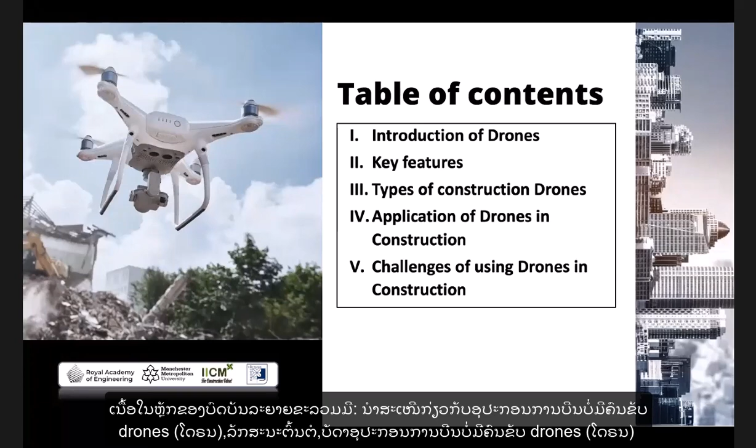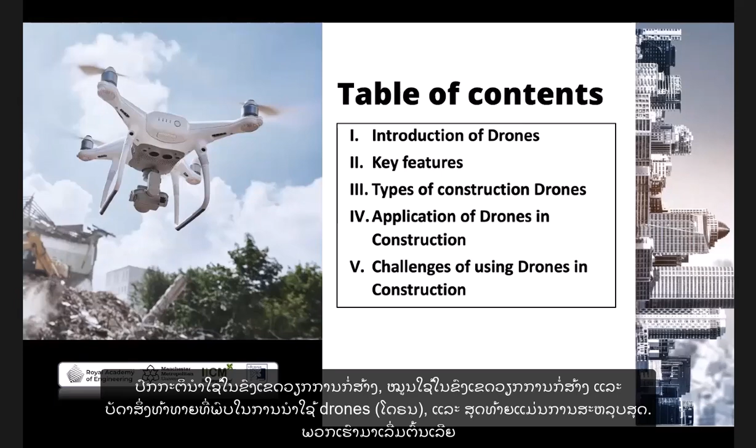Today I'm going to present to you an article which I wrote about drones and its uses in construction sites. In this presentation, I'm going to present the introduction of drones and the key features, the type of construction drones and application of the drones, and the challenges which are facing. In the last part, it will be conclusion. So let's start, starting from introduction of drones.

Actually, the actual name is UAVs, also meaning unmanned aerial vehicles, or drones. Drones itself means aircraft. They were originally invented as a war weapon, and they were used for missions that would be very dangerous for humanity. But recently, they are also being used in other fields, for example, for civil purposes, for business purposes, for military purposes. Civil purposes, for example, they can be used for recreation or disaster relief, also maybe for archaeological sites or conservation of diversity, and especially for law and enforcement.

For business purpose, they can be used for journalism, or maybe for advertisements and agriculture purposes, also for cargo transport and all that. And in military purpose, they can be used for surveying, for some special missions which are related to military.

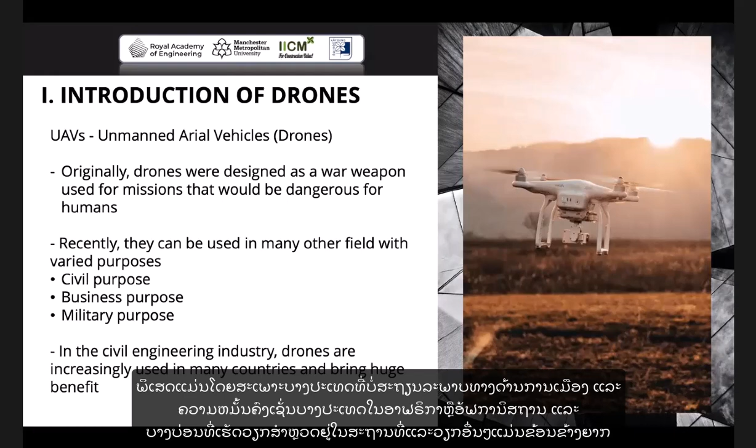But recently, the drones have really boomed the construction engineering industry. They are increasingly used in many countries to bring huge benefit, especially those countries who are unstable or where security is not good enough, such as maybe Africa or Afghanistan or some other countries where surveying and construction sites could be a little bit tricky. So they have been used for these purposes.

A key feature of drones: drones actually are very simple, with very basic features. For example, it has a GPS, which monitors the longitude and latitude and elevation points. It has a camera that shoots high-resolution photos and time-lapse videos, and also thermal sensors that take aerial heat and thermal images. For example, you can see the movement of bodies or the thermal reaction of a building in construction.

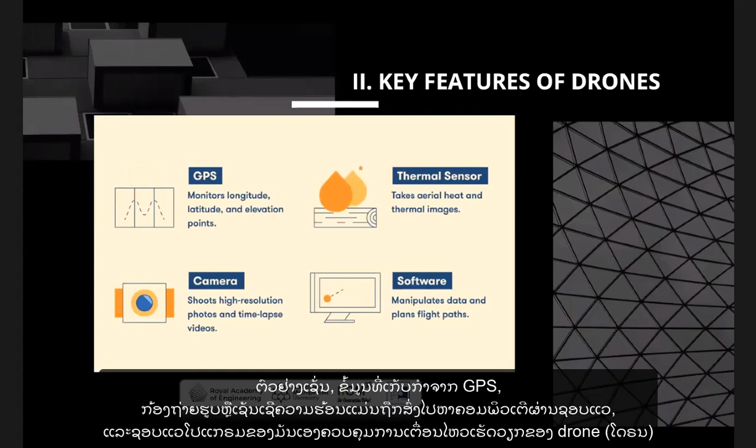And it has software which manipulates data and plan flight paths. For example, all data which is captured through GPS, camera, or thermal sensor can be sent to a computer by software, and the drones are also operated by software. So this is the main point of the feature.

We have types of construction drones. There are various types of drones, but in construction we are using commercial drones. In commercial drones, there are two popular types. One is fixed wing drone, and the other is rotary drone. Fixed wing drone is used for mapping and scanning, because it can go a really high distance or long distance due to its design.

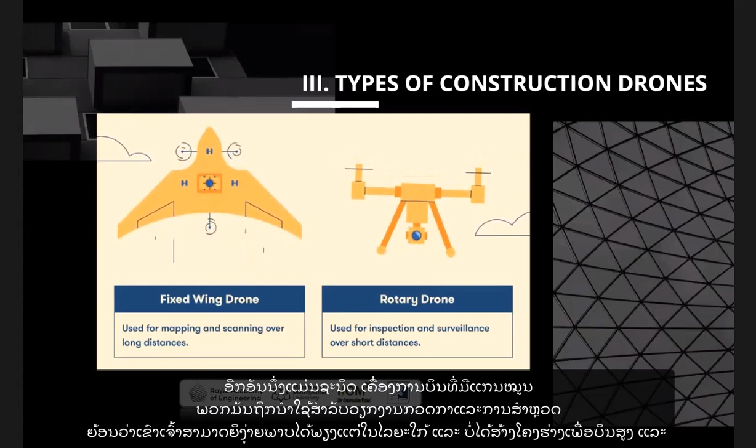The other is rotary drones, used for maybe inspection or surveillance, because it can only cover a very short distance. So it is not, let's say, as powerful as fixed wing drones. So the rotary drone is more light.

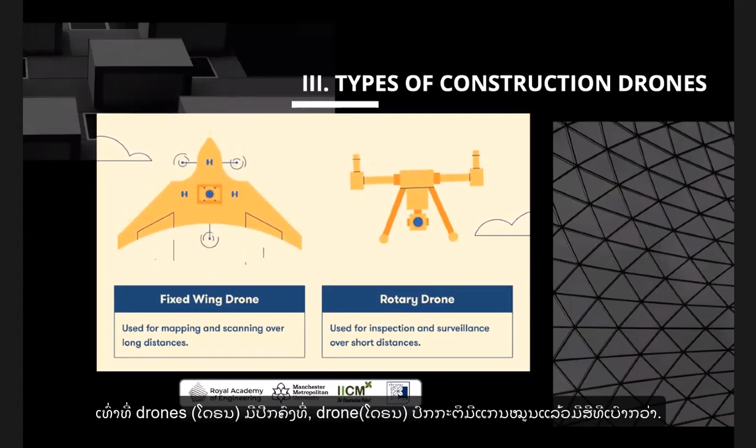Now we have applications of drones. There are many applications, but I have figured out 10 which were more eye-catching, or let's say more important. First of all is building surveying, one of the most important parts in construction. How can drones help us in this part?

For example, it can save us from wasting time, like surveying is always time consuming. So it can easily survey these buildings, and it can also help with risk. What do I mean by risk? For example, there is a construction site located maybe in a rural area, or an area more dangerous for stakeholders or building owners to visit. So surveying with drones can be more efficient because they can see the pictures and easily survey the site.

Also health and safety - for example, while surveying a building it's so dangerous, maybe the engineer can fall down, or there can be risks regarding his health. So drones totally minimize all these risks.

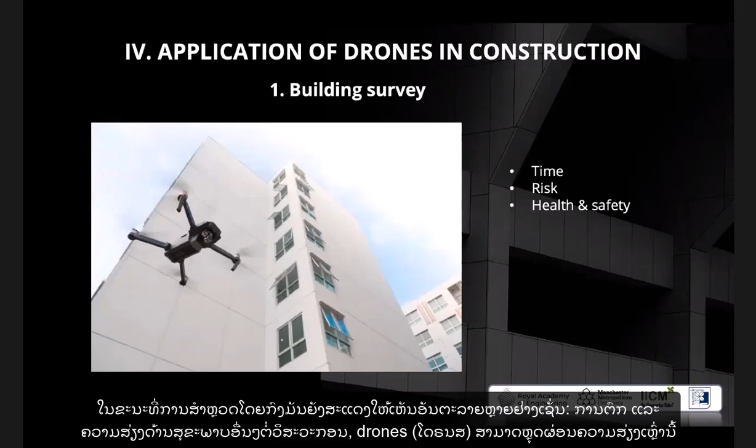The second one was construction site inspection. As I told you before, large areas in a construction site are really hard for inspection. For example, some stakeholders or building owners want to have the site inspected, but maybe they are not present in the city or country. So they can easily inspect the site via drones, and drones can give us HD quality also. It's really better, since a drone can catch better than a human eye.

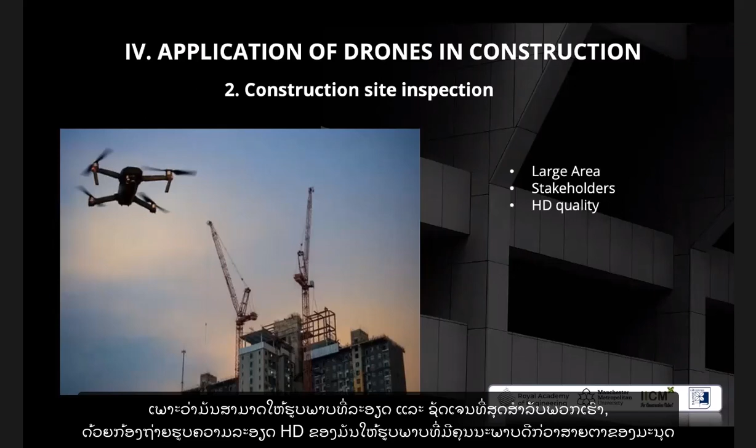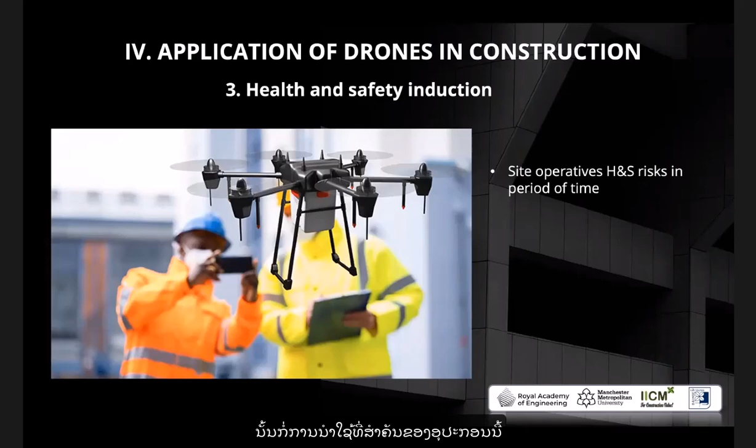We have health and safety induction. How does this work? For example, they save data - you can survey through drones and see where excavation has been done, where the workers are working. So you can minimize the risk of accidents by the usage of drones. That's also an important feature in construction drones.

We have maintenance and inspection. Sometimes there are high-rising buildings, or sites which can be challenging for humans to go through. For example, in the picture you can see a big pipe - maybe it's hard for a human to go inside and inspect. So for a drone it's much easier. Or there are high-rising buildings, and inspection can also be expensive due to the arrangements needed for maintenance. So drones really help us do it quick and easy.

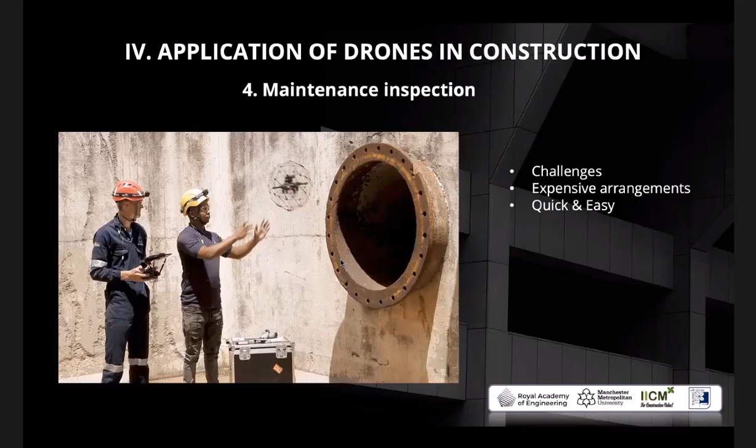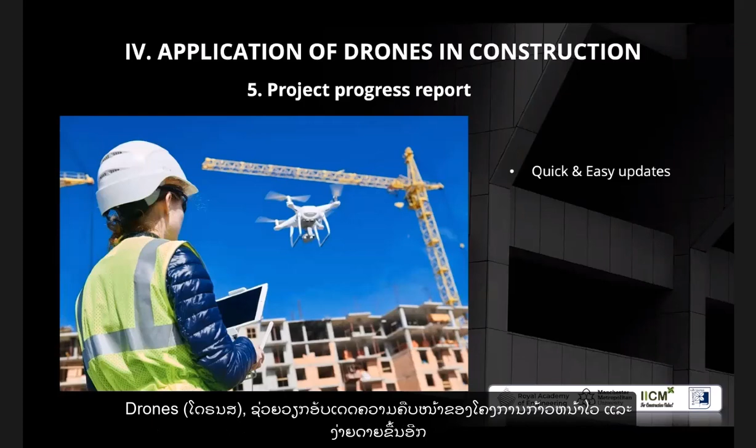We have project progress reports. This is really good for project managers because nowadays everyone is working remotely, so they prefer to stay at home instead of going on site to check progress. Via drones, they can operate and evaluate reports weekly or monthly, whereas an engineer on site might only get updates once a month. So it's quicker and easier for updates.

We have promotional photography. As we know, drones are really used for commercial purposes, so it has impressive photography and also 4K or HD video, and it can capture all scale and size. A drone can catch every angle of a building or construction site, so it can be really effective for photography and commercial purposes.

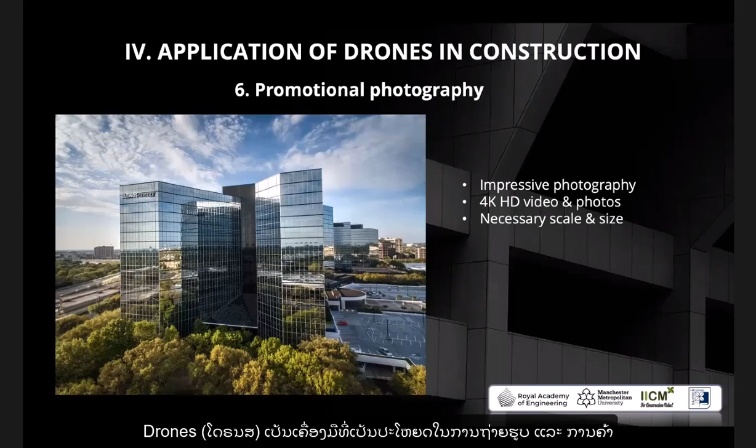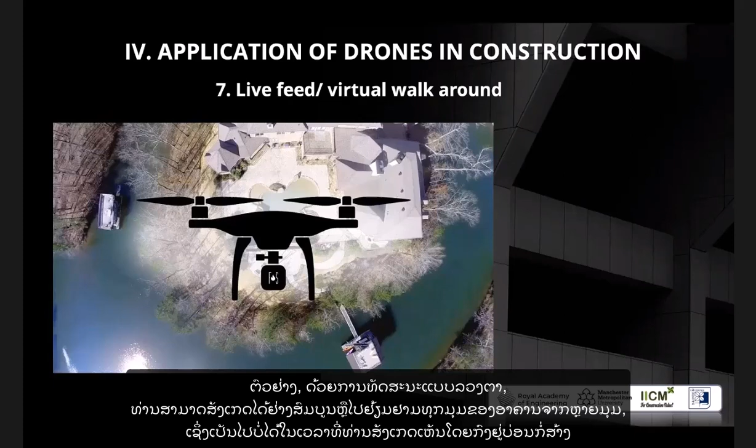We also have live feed or virtual walkaround. For example, some building owners, construction site owners or stakeholders want to experience the site up close but are outside the country, so they can experience it through the virtual walkaround. It's more effective for surveying too, because you feel like you're on the site. You can do the virtual walk from the top of the construction site at every angle, which wouldn't be possible if a human or engineer did it himself.

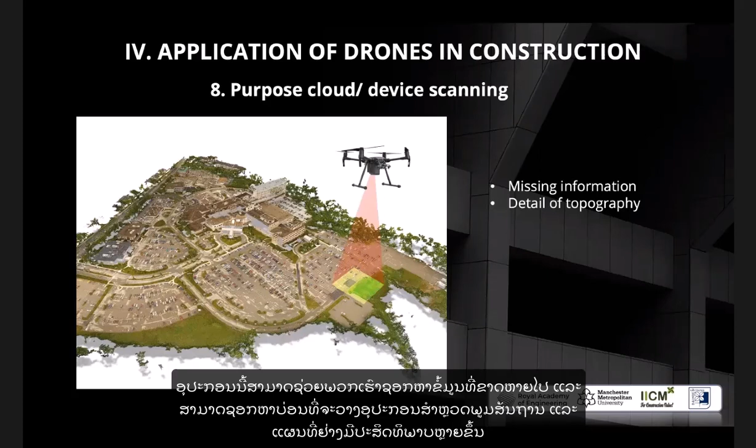We also have point cloud or device scanning. This is most useful for finding missing information, because when we have a large construction area, we always have some missing information. This helps us find missing information, or survey sites for topography and cartography purposes. It can be more efficient.

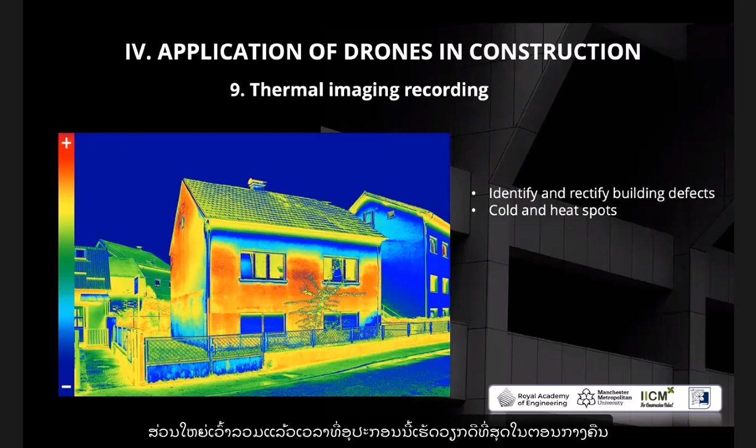We have thermal imaging recording. This figures out the cold and hot spots of a construction site. For example, cold spots are shown as blue and heat spots are shown as red. So it can show us the reaction or what is going on at the construction site, even the movement of humans inside it. Most of the time it's used at night for better evaluation.

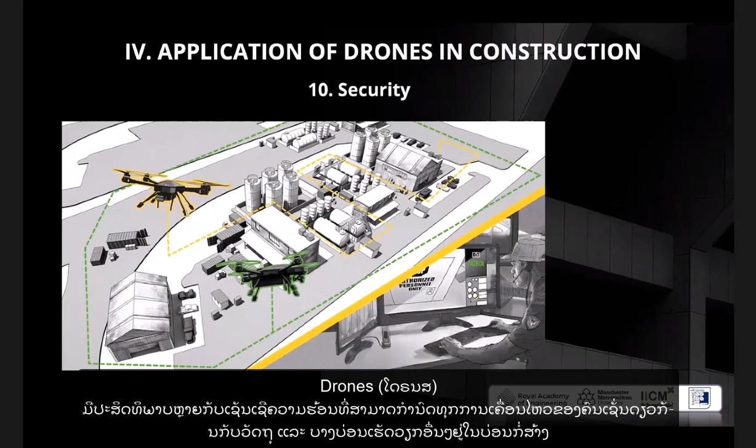We have security. As I mentioned, for large construction sites it's really efficient because it's hard to maintain security over such a large area. Drones can be really effective here, and with their thermal feature, they can figure out the movement of human beings and the movement of chemicals or other reactions on the construction site. So these were all the 10 features that I explained.

Now we have some challenges. Even an easy step still has some challenges, and drones face some too. For example, there can be a lack of IT infrastructure. Using drones may be hard or tricky between people or between high-rising buildings, so there are very few professionals who can do this work well. That's why there is a lack of IT infrastructure.

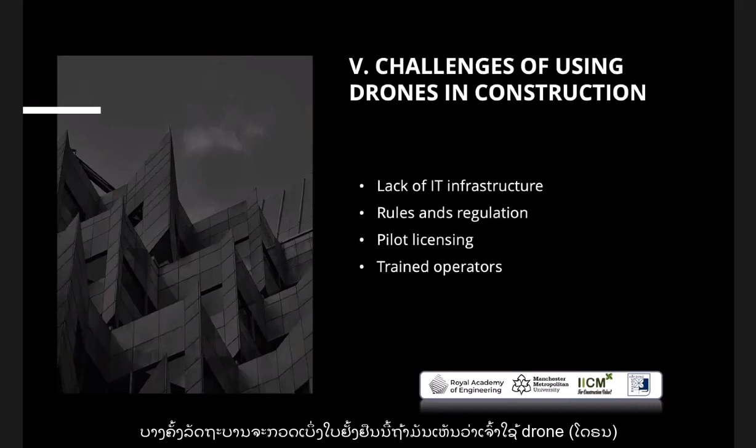There are also rules and regulations, because drones are not permitted everywhere, especially in some countries where they are not even allowed for commercial use. So there should always be some kind of certificate or licensing used, so you can show the government that you are allowed to use these drones.

We also have pilot licensing. As I said, it's tricky to use drones, especially in tight areas or where there are more people around. There should be training in their job, for example for engineers, for pilot licensing, because it's similar to being a normal pilot. You are operating the device from a room through software, so it's even more tricky and hard.

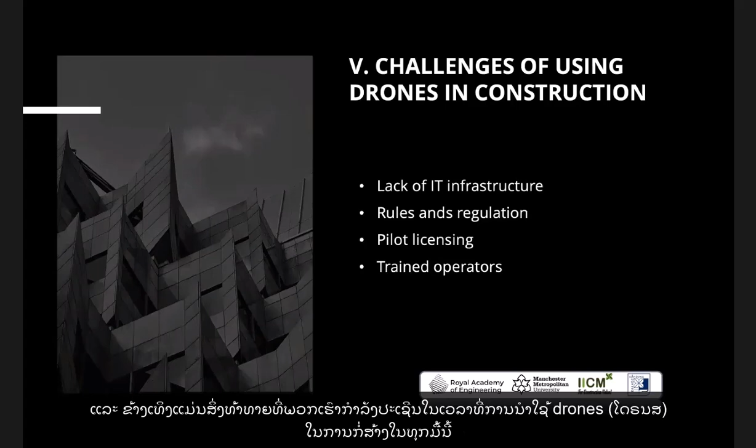And there are trained operators. As I said, after taking the pilot license, you should be trained in the work. You cannot use drones right after taking your license or finishing training; you need some experience so you can be more efficient in using drones. These were the challenges, and nowadays the construction industry is facing them.

Overall, although there are some challenges, there are still good points. Nowadays the drone system has really boomed in the construction industry, and people are more likely to use this tool more than regular construction equipment in their daily lives, which has really made the work of engineers and project managers easier and more efficient or beneficial on construction sites.